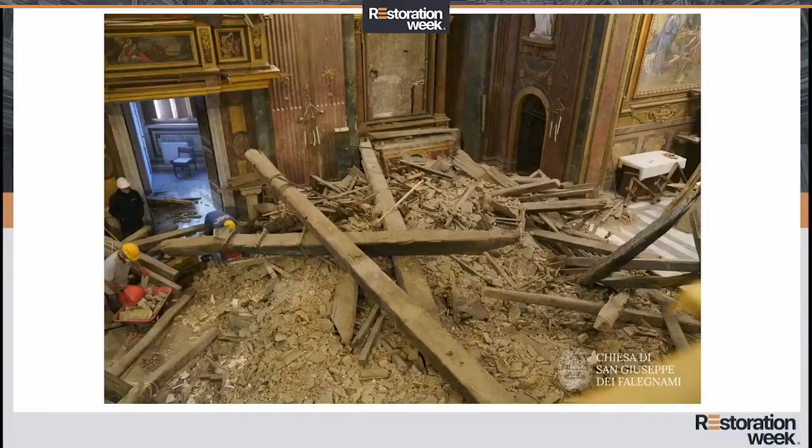Here you see the collapse that Mr. Bozzetti will show to you — the sudden collapse of part of the ceiling that caused several problems. So there was the collapse and the water falling that could continue to damage the building, the need to immediately protect it, and the need to understand why the roof had collapsed, and then all the subsequent issues, like how to reinforce the structure and how to reconstruct the ceiling, and all the related details.

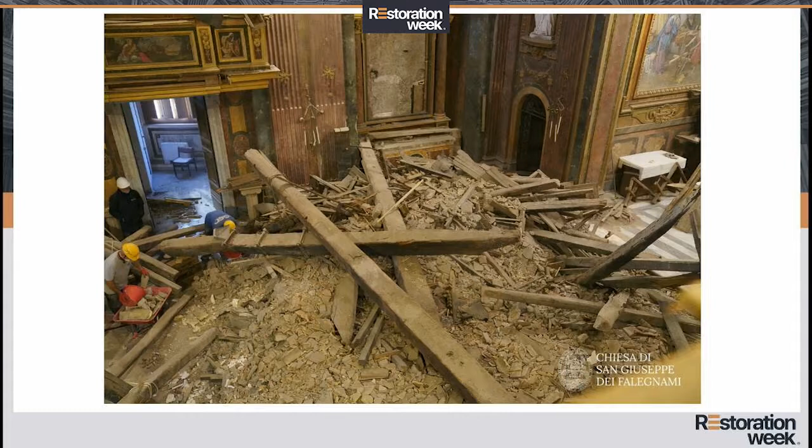So everything was approached in a coordinated way, with contributions from engineers and the Ministry of Cultural Heritage, and the utmost attention by the church in solving the administrative problems. And the result is very interesting.

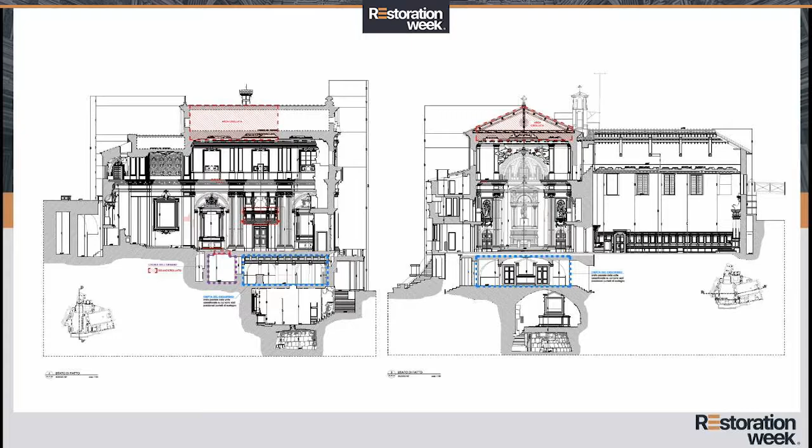In these images, you may see on the left-hand side the portion which collapsed, two-thirds of the ceiling. And if you look at the bottom, you see this area, which was a prison — it appears that St. Peter and St. Paul were imprisoned here. So it's full of history. This is a 17th century building, which was then renovated in the 19th century, so there were many restoration issues that were brilliantly solved.

So this is the decorated ceiling that has been restored, and which had been damaged — a wonderful ceiling that was studied in detail, piece by piece, with deep knowledge of each single piece.

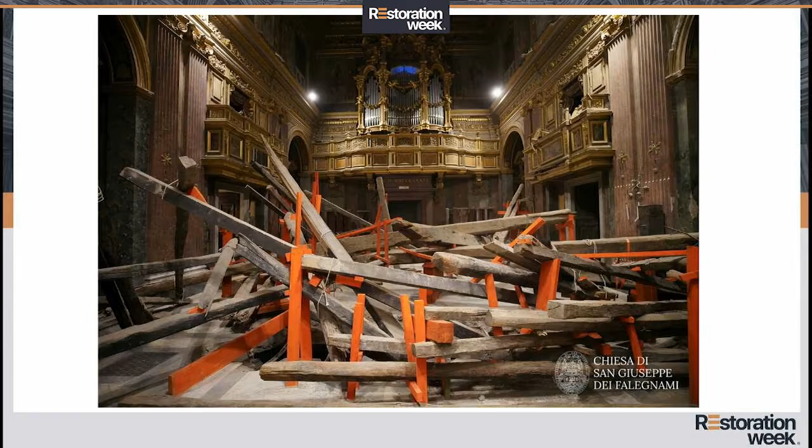So let's go back to my initial words: what is the common trait, the fil rouge? You need to study, you need to understand, both on the basis of the documentation you have and direct observation. Fortunately, a survey had been carried out just before the collapse, so it was possible to consider the techniques too. Each case is different from the others, but it's important to have broad knowledge — this is something Mr. Bozzetti is going to mention in detail. But in order to succeed in defining the causes and eventual responsibility of this collapse, some studies were carried out.

I was mentioning the guiding elements for the restoration. Several fundamental concepts have emerged that were also mentioned before: reversibility, intervention, compatibility, and the authenticity of expression.

You don't have to create any fakes. You have to allow the monument to tell its own history, which is embodied in its materials.

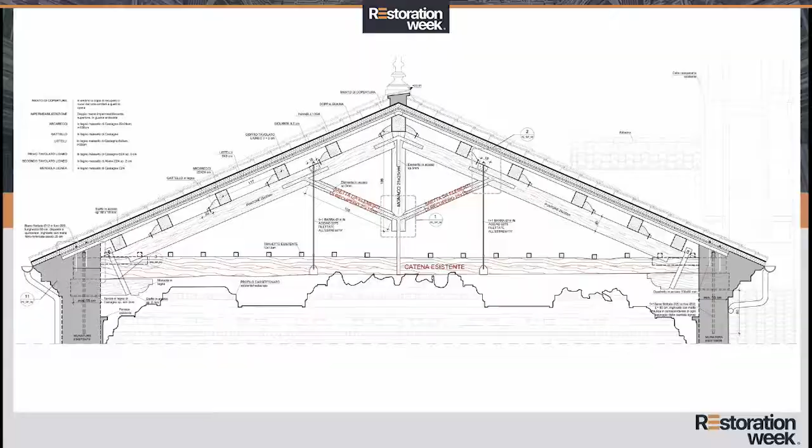In this case, we have a clear example of minimum intervention. This concept is sometimes misunderstood because it appears that you want to do a limited amount of things, and sometimes people think you want to do little things and you don't want to do too much. No, the truth is the opposite, because for this reason we wanted to keep, for instance, the old trusses, and we improved the entire system of trusses with that specific portion that allows the system to be sound. And this can also be reversible.

Then there is the issue of execution. In this case, two main companies worked: one a building restoration company, the other dealing with the restoration of the works of art. I had the chance to visit the site on several occasions, and I saw that they were keeping the ancient pieces and acting carefully. They were removing the trusses and the main structural items with a great deal of attention. So the restoration is a theory that translates into good practice.

That is to say, based on a project, on a plan, but also during the construction phase. There's Martha Nussbaum, a US philosopher, and Dario Antiseri, an Italian philosopher, who say that nothing is better than good theory, because sometimes theory is considered as just words, and practice is something different. Whereas a good idea guides a good implementation. This is the reason why preliminary ideas allow for good practical results.

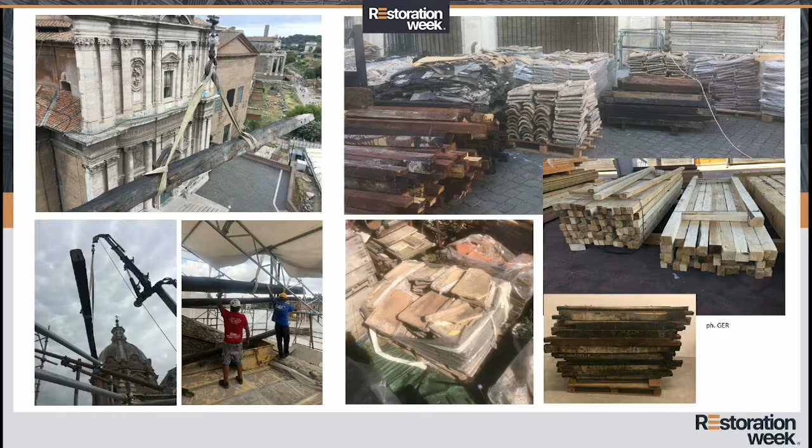After one year, the church was covered, and it was possible to organize a religious ceremony. Then after two years, the restoration is almost over, which is rare, I have to say.

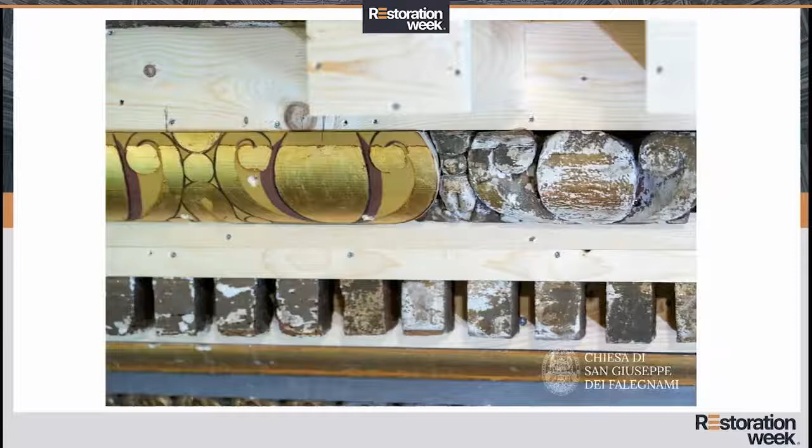So rarely, but it happens. Architecture was very careful. So the restoration is fundamental, and many things have to be taken into account.

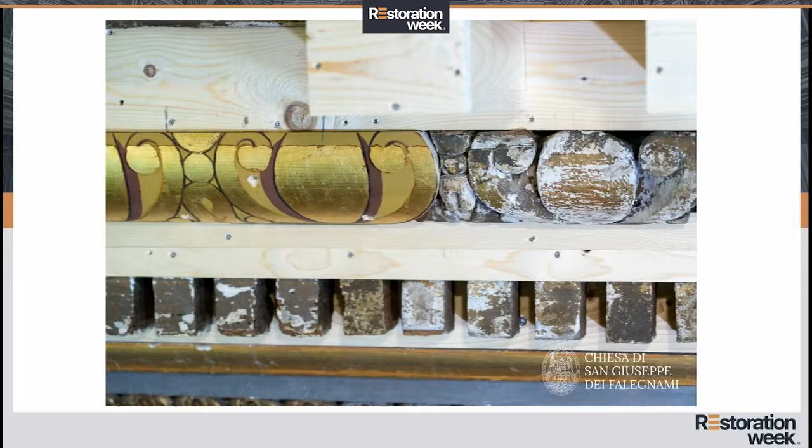So the authenticity, the distinguishing traits which have to be visible. Look at this frame: on the right-hand side we have an original part, and the left-hand side is a restoration test. It's not copying the old one, but reproposes it through, in this case, a pictorial system which is not the classic one. So it accompanies, but it doesn't create from scratch—allowing everyone to clearly identify what is authentic, what is ancient, and what is restored.

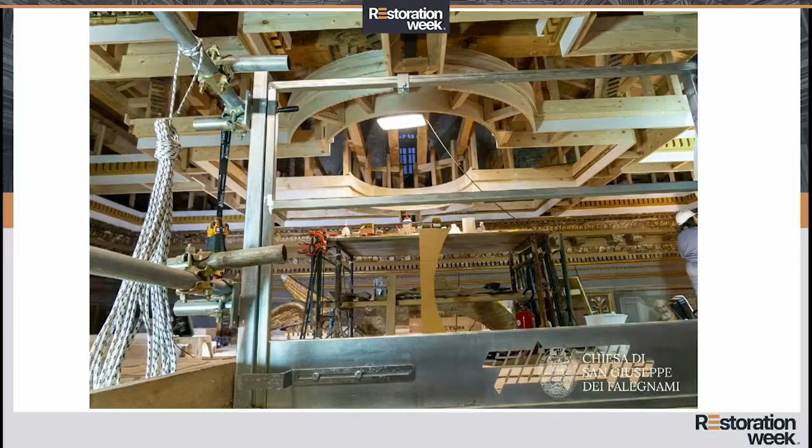By way of conclusion, it's easy to say things sometimes, but it is complex when you have to do them, in particular the reconstruction of the entire structure, for instance the ceiling. It's very interesting to see how observation showed that this ceiling was a work of art that had probably been modified by several people during several times. In fact, the horizontal pieces that had been introduced had been somehow moved in order to make them visible from the ground. But what is the effect that you get when you access this church?

Well, of course, the new part is the one that is more easily seen. So during the restoration, the new part is more visible at the center, and then the original pieces were put back in their positions, and all of the damaged portions were, let's say, put back. But what matters is that at first sight you have a complete reconstruction of this image, also in consideration of some interventions we made. So each single item, each single element was catalogued and kept, and whenever possible it was put back in its place, and the original pieces were put at the center of the image, so that it was important to show the ancient part. But these wooden pieces were not cut.

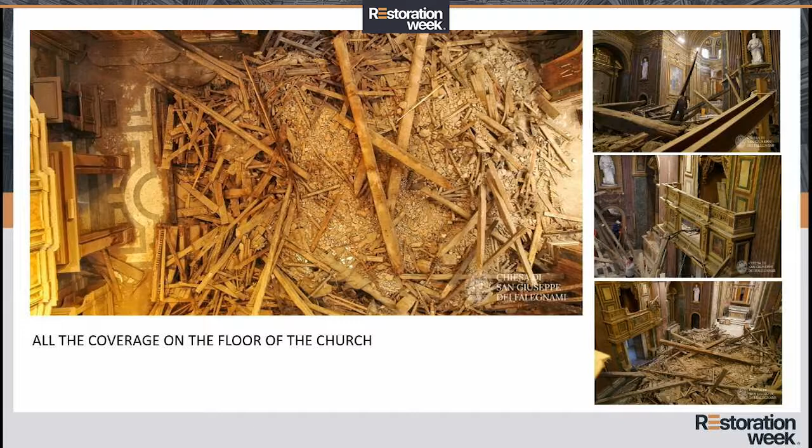In these images, we have two thirds of the roof which collapsed onto the floor of the church, and which also partly caused the collapse of the area in which we are today, of the ground. And of course, this disaster is clear.

As Professor Carbonara said, during the first phases works were aimed at preserving the materials, also with some provisional covering with pipes and joints, and some shields that we put on the roof, because there were a number of investigations ongoing to understand the causes of this disaster, this collapse, and any persons in charge and responsible for it. There is still a judicial proceeding which is ongoing, so we are saying nothing about that, and nothing about the conclusions that were somehow reached.

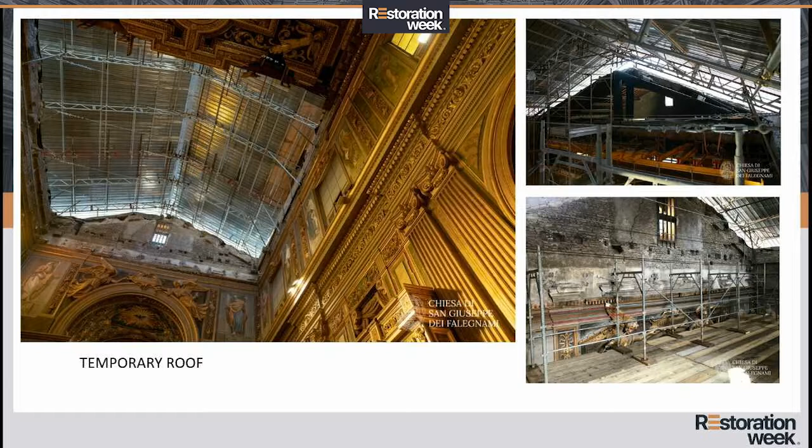We can only say that the causes are neither due to aging nor due to, for instance, rain or attack by microorganisms that had eaten the essence of the wood, and therefore it could not hold the roof any longer.

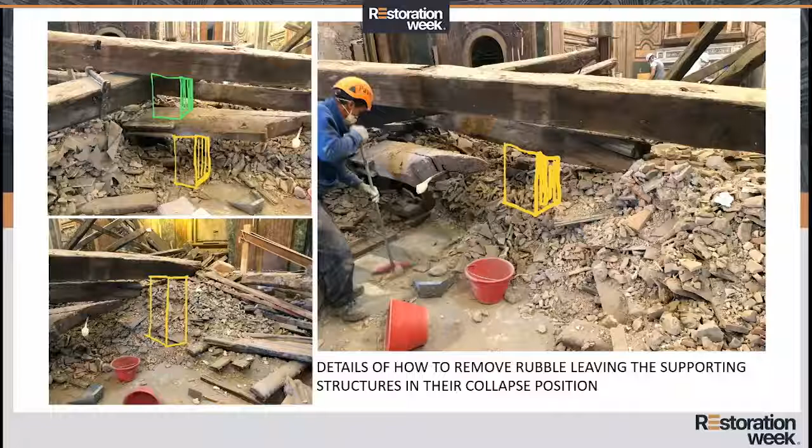These are the images that show the activities carried out during the works. During the investigations we were asked to keep all of the wooden structures in their position after the collapse. In fact, we kept, for instance, as you can see from these images, all of the objects as they were.

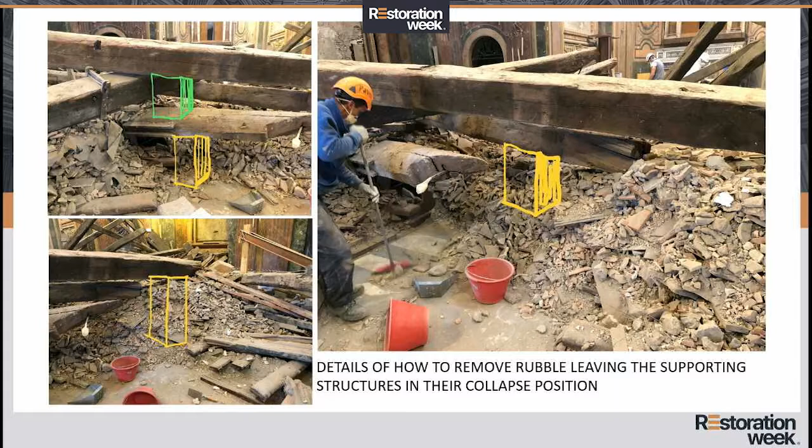Now there is an image which shows the way in which we worked. We were all at the site, and these are some sketches made in order to explain and understand how to proceed, by lifting the bearing wooden structures and removing the rest of the materials. This brought us to the configuration that Professor Carbonara showed, that is to say, the whole freed from the entire portions of the coffered ceiling, and from all of the remains and debris that were on the floor.

The things you see in yellow are some wooden items included, and they were colored yellow because they had to be visible. This allowed the magistracy to take pictures and laser scanner images, and to deepen the knowledge on the main and root causes of the collapse.

So the entire planning of the activities and the design, although the site had not been unveiled, we were already thinking about how to construct. As said before, the work started on the 3rd of June, and by August we had already completed the roof. So here it shows how we conceived the ceiling and the covering.

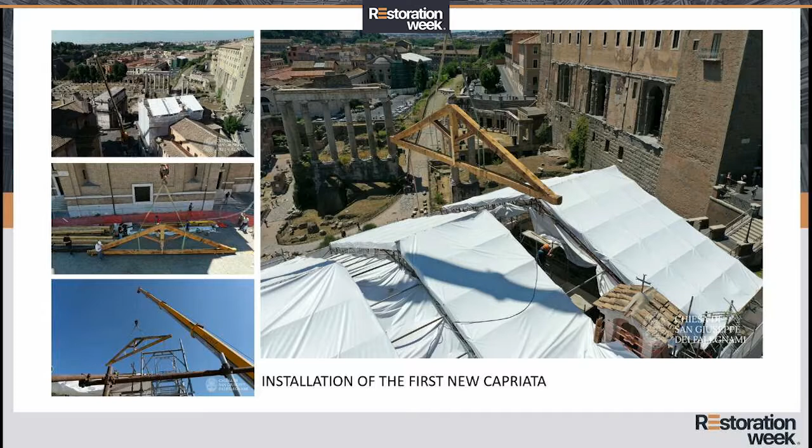There were three main fixed parts and two central ones with some covering that could be moved. So there was a pre-assembled truss that was put in place by only removing the main flap. And then some specific activities, like, for instance, the basis of the truss.

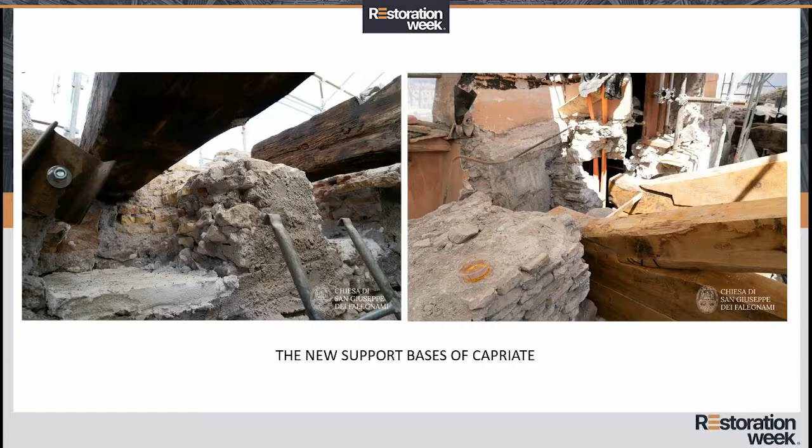And then we're going to show a video that shows the inclusion of some items, for instance, that increases the basis of the truss, thence reducing the area in which it was possible to work.

And also, this is the item I was mentioning that didn't exist before. Before putting it on the wall, there was this bracket, this console that separates the bracket from the wood and preserves the bracket and the entire truss. But the supporting portion was free, like 2 or 3 centimeters of air, which also allows inspection and maintenance whenever needed.

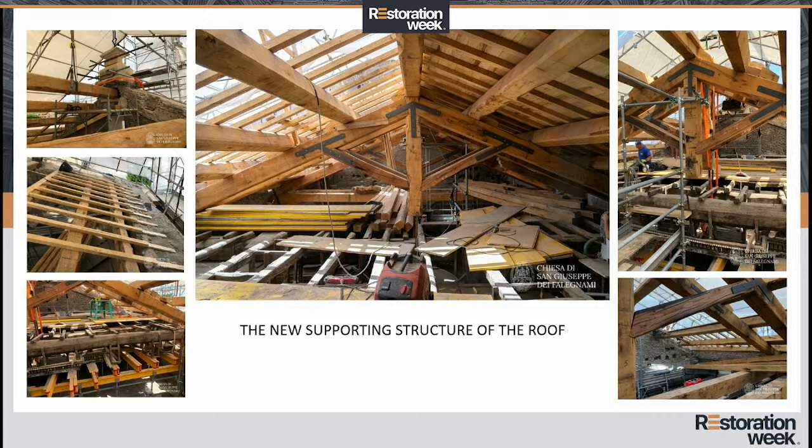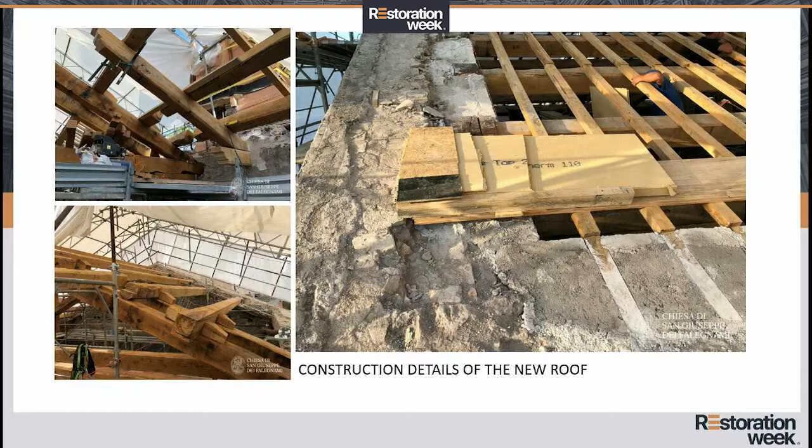So these are some images taken during the execution of works that show the accuracy and the ways in which the various activities within the restoration works were carried out. These images are evidence of, for instance, the final layer. This part, which before the collapse was made of bricks and flat bricks, was replaced by a double cross layer and also by a system of thermal insulation, which makes everything lighter and more compact from the anti-seismic standpoint, allowing better conservation of the wood.

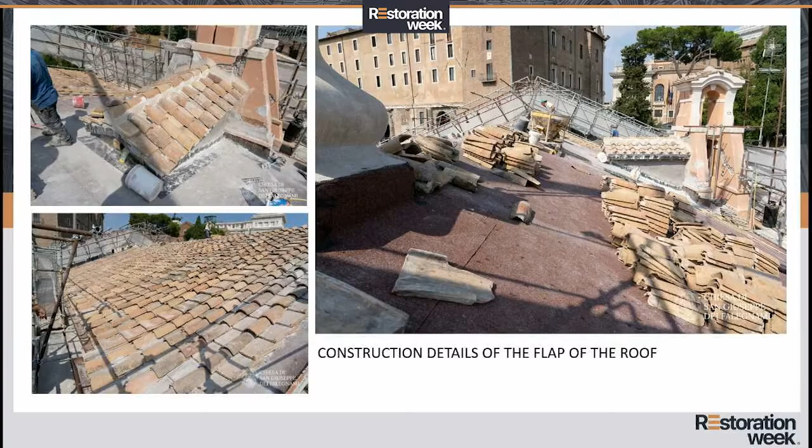So this is one of the final phases, in which we also see the possibility of insulating the area and the waterproofing, and also putting the tiles on the roof.

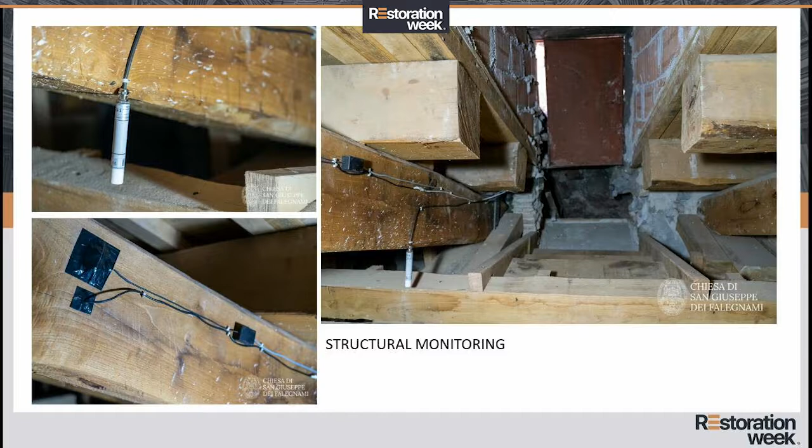In this phase we also installed an environmental monitoring system which monitors temperature and humidity, because it's necessary to keep monitoring the situation. It will help us understand whether we need to add a system of windows to manage humidity and temperature, or whether we need an air conditioning system. The main reason is to allow the microclimate under the roof and above the ceiling to have a temperature that improves the lasting of the entire structure.

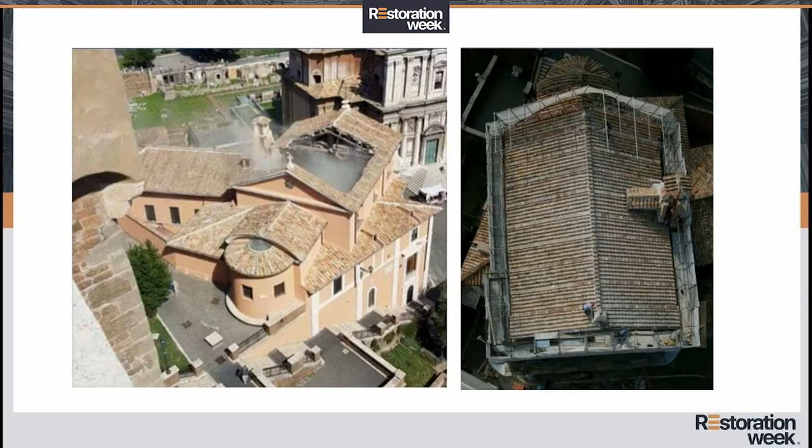So you see that 12 months after the collapse, this is how the situation was. So we are fast, when we tell things.

But there are two websites in which we have detailed information. One is the one of San Giuseppe dei Falegnami, and the other one is a magazine that allows you to collect more information in this connection. Thank you.

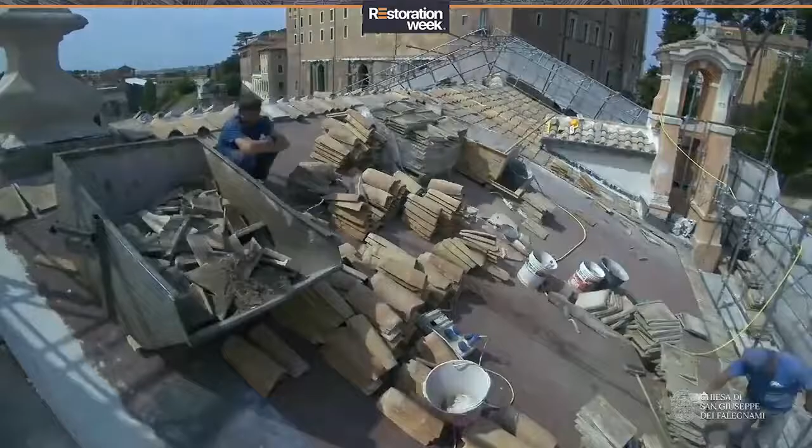So we saw a time lapse showing the entire reconstruction of the roof, completed on the 30th of August 2019. The activities started already, also for the reconstruction of the coffered ceiling, with a series of meetings and debates and sharing of views, and also design in order to make the best choices.

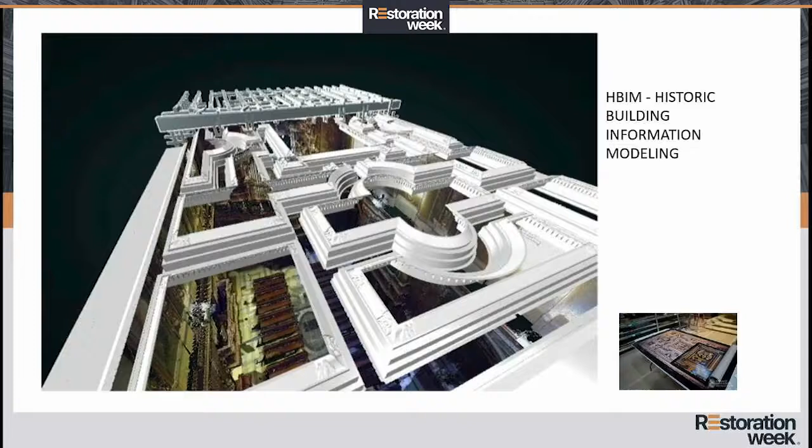So this image is a high-definition one that we had, because in 2015 the entire structure had been restored, at least the external part, in order to open the museum which is close to this place. So luckily we had this high-resolution image and a laser scan of the entire situation, giving us a geometrical basis that was quite reliable.

And to it, we added our own surveys. In fact, here there's a portion of reconstruction in HBIM form, made through the laser scan from 2015. In the background, you see the reconstruction of the lifting system of the coffered ceiling with the two transversal items, that is to say the main portions of the trusses which had not collapsed.

For this reason it was possible to make the 3D projection of the entire structure and to make our checks and assessments. This is the main structure on which we put the main portion of the coffered ceiling. All of the surveys were necessary to achieve the precision needed to put two-thirds of the coffered ceiling back, and to put each piece back to its original position.

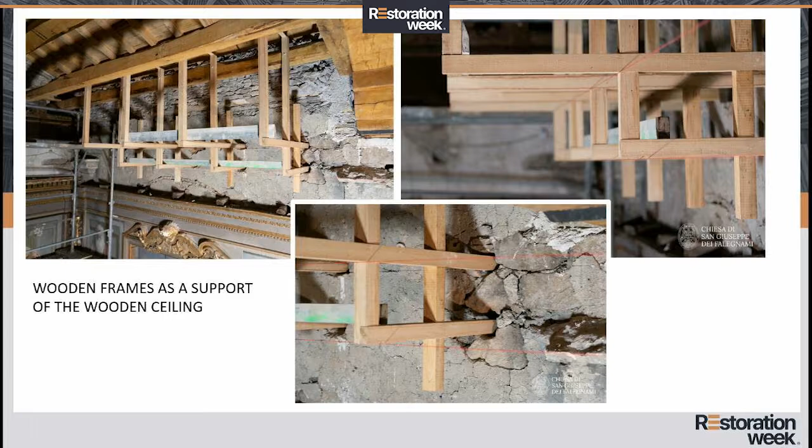So in this case, together with Leonardo and also the other companies, we decided to make sustainable interventions, and therefore we decided to take this wood from Cadore, where in 2018 there had been a flood. Many trees had been destroyed due to the flood, and we decided to buy the timber from those companies that had that wood.

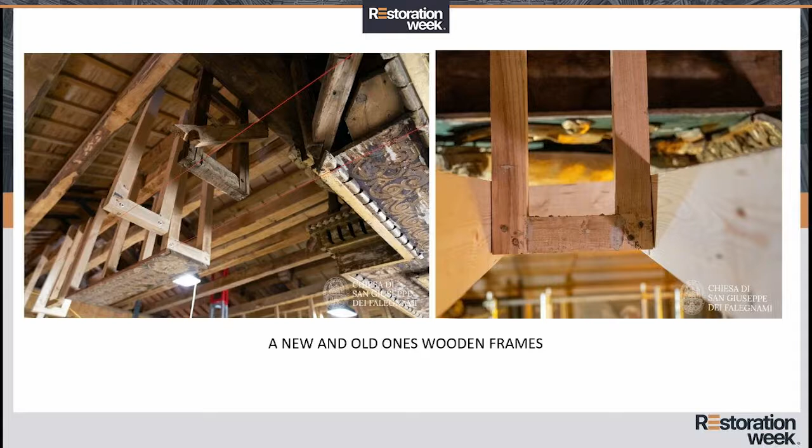So these are some details that depict the main structure on which we put, for instance, the different portions of wood, which are then decorated, and then the frames were added, as we mentioned before. This is a significant image, and I hope the green, yellow, and red colors are visible.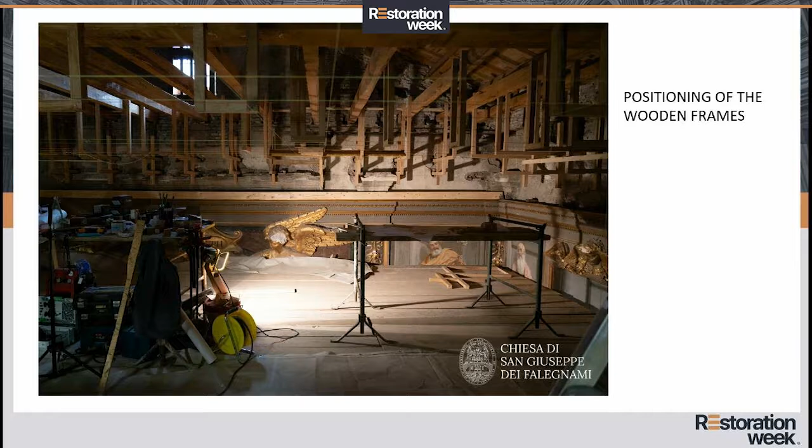This is how we organized the reconstruction, with a matching between these surveys and the images we had from the 2015 surveys and the beam data. So these are, for instance, additional items for the curved portions, which were then molded in order to obtain the right curves and the right shapes, that is to say the ones of the existing coffered ceiling.

This is an image we saw before. This is the way in which we could reach the upper part of the church, and this part was completed before applying all of the frames that we had recovered in the first phases following the collapse, and also the ones we constructed and developed subsequently. So now I give the floor back to Andrea, and then he decides to whom he wants to give the floor after me.

As we said, we have analyzed causes and effects of the collapsing. Structure is a priority here, but the emotion of a house is given mainly by its skin, the decoration, the aesthetics. So restoration together with structural restoration is a very important part. Paolo Scarpitti, Special Superintendency of Rome, has dealt as a designer for the restoration of the surfaces. Thank you, Paolo.

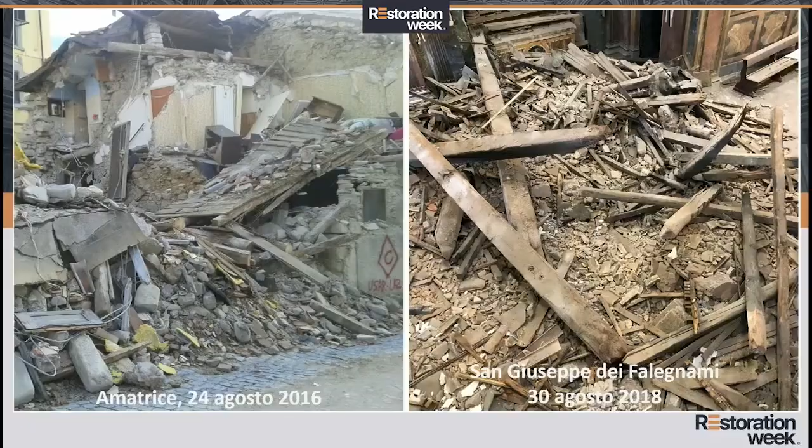So we may see that the ministry was involved in all of the disasters that take place in Italy. In this case, you see an image of Amatrice taken on the 24th of August 2016, and two years later in this church. Similarities are there, but the experiences we gained, especially in the last three earthquakes, allowed the ministry to improve its skills in terms of cataloging and preservation, contributing to the restoration of the coffered ceiling in this church.

So the first thing done was dividing the map and the points where the debris fell into 6 colors. You see the different colors. At the same time, we identified the specific items, and each one was given a name. For instance, H1, so H Lacuna, H1 the Madonna, and H2 Saint Joseph. But each and every time we were taking debris, then at a one-to-one scale, the single elements and items were...

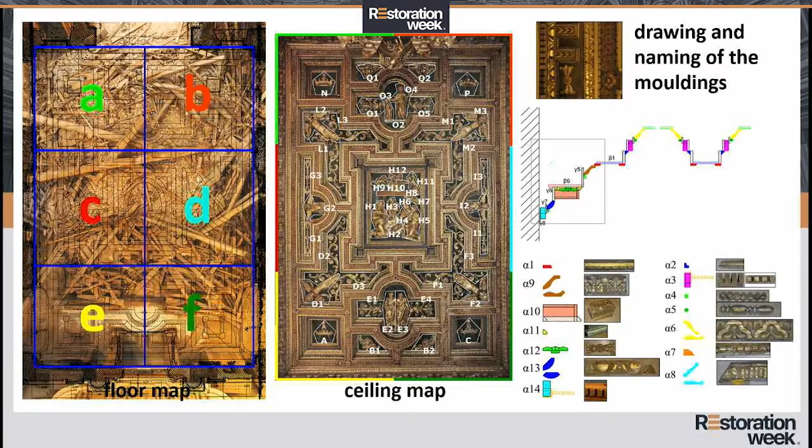So once the map was drafted, as it happens with earthquakes, the first thing we did was first cleaning of the elements in the apsis of the church, which had been left intact, to remove the dust that was there. And in the oratorium close to the church, we arranged a sort of warehouse, like the ones we've arranged in different Italian cities following earthquakes, like in L'Aquila or in central Italy or in Emilia-Romagna.

So we were making a sort of clear inventory of all of the pieces, which were measured and then put inside of each single scaffolding. So this is an example...

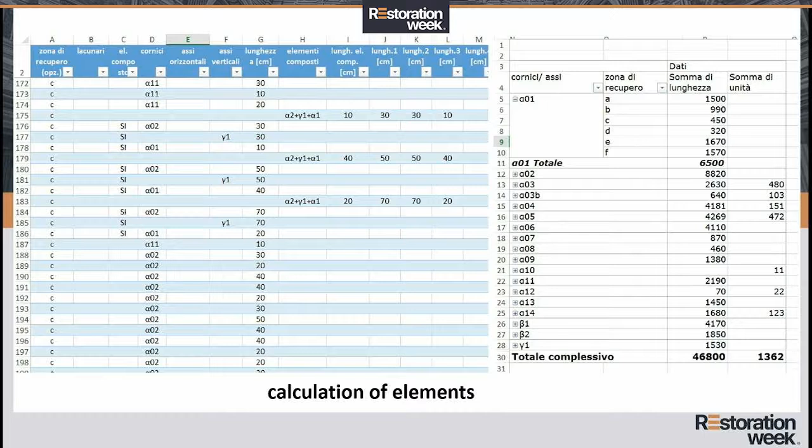...of the database that we have developed, also together with Leonardo, which helped us in making this extraordinary intervention. It was fundamental for us because, as you may see, we have divided - you may read the different portions, all of the elements included in our inventory. So we knew where each portion was taken, where it belonged, and where it was put, and then also quantified, because we needed to understand how many pieces needed to be reconstructed versus those that had been recovered.

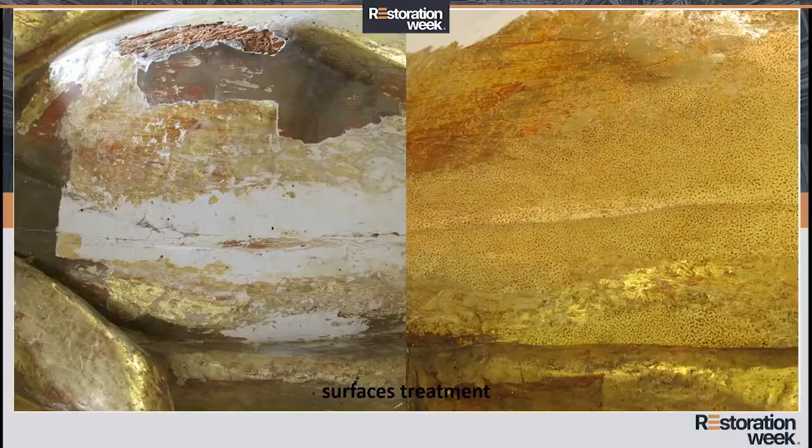Now let us go back for a moment. You see, if we go back to the slide projection, what we were saying before is clearly depicted in these slides.

On the left-hand side, you see the conditions of the Madonna's left leg, which we saw before. There's a very dark layer that was included in several portions. Under this, there was another layer of gilding, to arrive then at what you see at the bottom, somewhat abraded, which is the original gilding.

Once this second layer was removed, we find ourselves in the situation on the right, where you can clearly see these dots. This is essentially the equivalent of gold, though there's no actual gold, just a chromatic aspect. But from a distance, these dots mix together and give the perception and idea that it's golden.

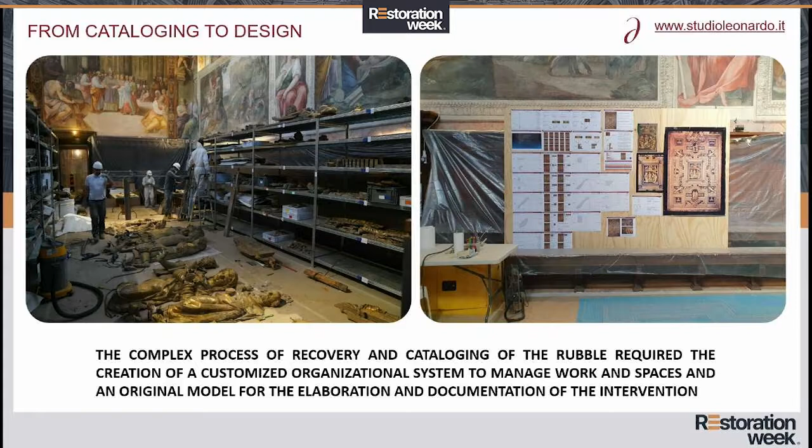We took part in the recovery phase of those portions that had fallen from the roof, which we recovered. That was very important, because by doing so we were able to better understand what had happened, and therefore we started thinking about how to better restore the ceiling.

As Dr. Scarpitti said, it was very important to analyze and study the pieces that we recovered, and also the study of the decorated elements, of the statues, for example. That too was very important.

Now the serial pieces were identified through this analysis by Dr. Scarpitti in various phases. There was a very punctual analysis carried out for each element with the laser scanner survey that had been carried out some years before.

Thanks to that, we were able to measure what portion of each element existed and what instead had to be filled in. So we were able to identify the quantity of the serial elements that were recovered, 49.5%, and that helped us decide how to reconstruct and integrate those elements.

Now the work then brought us to an even greater recovery. We were able to recover 65% of the original portions in the serial parts. The estimate was initially a little bit lower than it actually turned out to be. As to the sculptures, we were able to recover 90% of the elements.

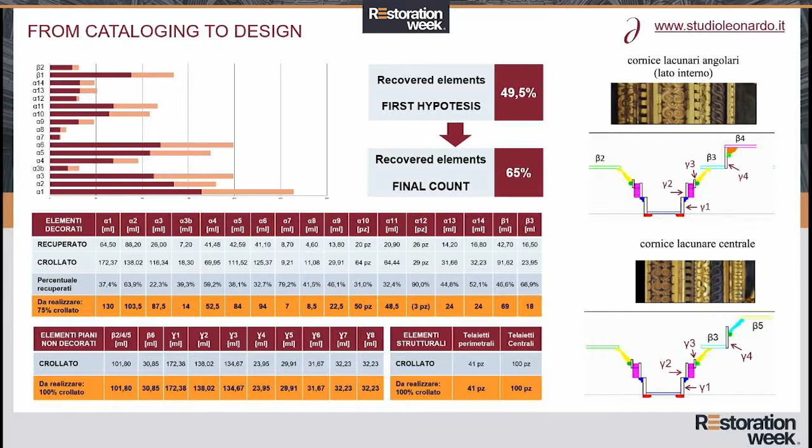So based on that data, we started the intervention, our reconstruction, and of course the laser scanner was the starting point, which you see there on the right, because it was fundamental to obtain all of the information, all of the details, which during the restoration itself proved essential to address the questions I was referring to before.

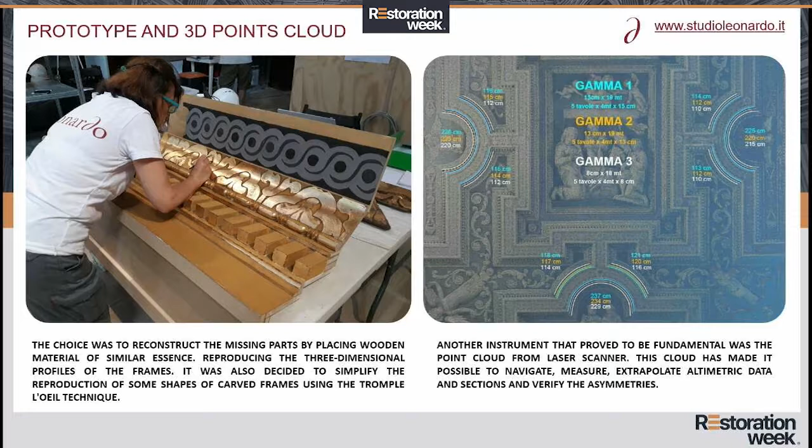So it was like having a virtual ceiling that we were able to use in trying to address the various issues. Then another very important thing was the creation of a prototype, a physical prototype, which we positioned in this area, to try to understand what impact the reconstruction hypothesis would have had before the reconstruction itself, using for example the lights and shadows and the technique of decoration.

And then starting from this, we were able to start with the site. There were 4 parallel areas. The first 2 that you see represented here started immediately at the end of June 2019. The first one was the site here in Rome, to recover and restore the original portions which had fallen and which, as I explained, had been recovered and catalogued.

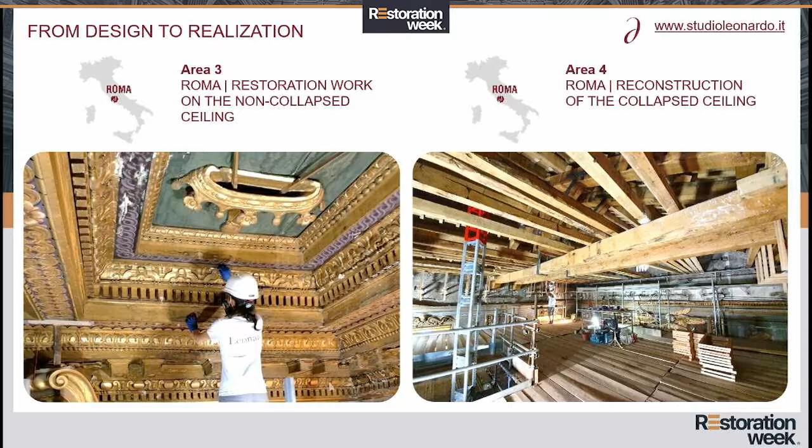Then another team of restorers and carpenters worked in Bologna in a laboratory to create ex novo some pieces which had to be integrated with the pieces that had been recovered. Subsequently, starting at the end of August, when we could work directly in situ, we started 2 other parallel phases: Area 3, restoration work, with that portion which remained in situ and was conserved; and Area 4, with the reconstruction of the area that was missing.

As to Area 1, the restoration site with those elements that had been recovered, Adele Galitte had an intuition. She was one of the technicians who acted as an overseer for this site, so she created a one-to-one reconstruction.

Based on the laser scanner, we reconstructed, much like a puzzle, the decorations which were missing. The fragments were sometimes very small, so the work was very difficult. We had to carefully recover and consider each single piece, and position them as closely as possible in the original place.

A detailed analysis of these pieces told us that some had to be placed in specific positions. Their sizes were such that when you looked at them from below, it appeared that they were somehow moving. So it was very important to reconstruct things as we did.

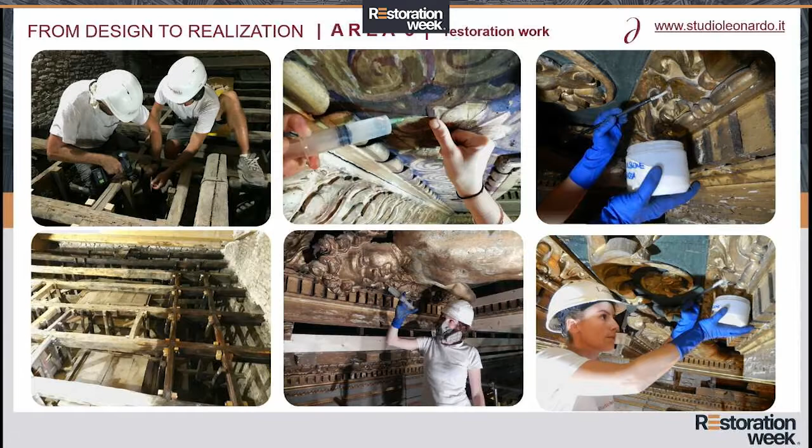This was the area that started at the end of August, the restoration and recovery of the portions that remained in situ. This was fundamental because it allowed us to better understand both the structural part and the decorative one, and to truly understand how the ceiling had been made.

So we were able to study the restoration, study the decorations and their state of conservation.

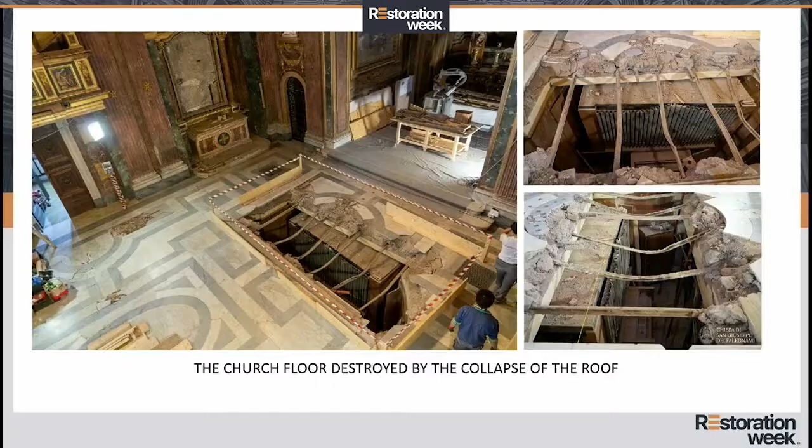This is an image that clearly shows what I'm talking about. It refers to exactly this place where I'm speaking right now. The area above us is not geometrically extended to the entire part of the church. So this is the image I'm referring to.

As I was telling you, this is the part of the ceiling that caved in, that fell in due to the collapse caused by the roof elements that fell. This was probably something created in the first years of the 1900s, and which was therefore more delicate, and weaker, and so it completely fell in and crumbled after the collapse of the ceiling. It was completely reconstructed.

In this case, the difficulty was exactly the same as with the coffered ceiling. I'd like you to notice that the design of the frames of the pavement represent the exact projection of the lacunari of the coffered ceiling, where we have the nativity in the central part. There is a geometric design which represents exactly that.

On the left there is the statue of the Madonna and the Holy Child, and then St. Peter and Paul on the other side, who are the patrons of Rome.

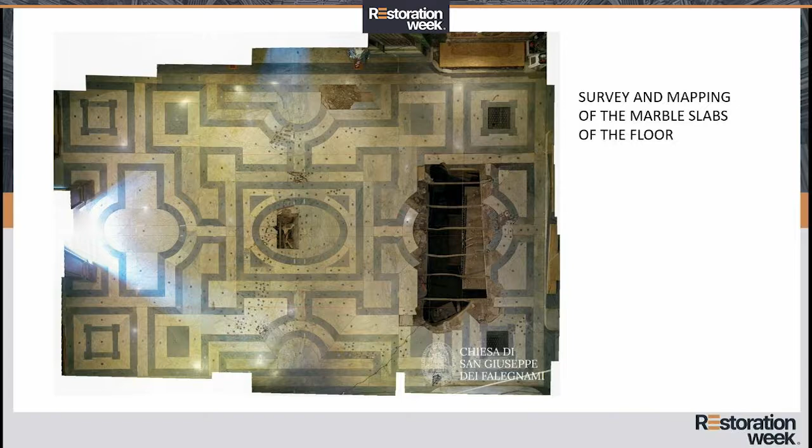There is no design of the area that collapsed, the one we see on the right part. So in this case, we took the part from the left and created a mirror image on the other side, with all the approximations that pertain to this type of approach.

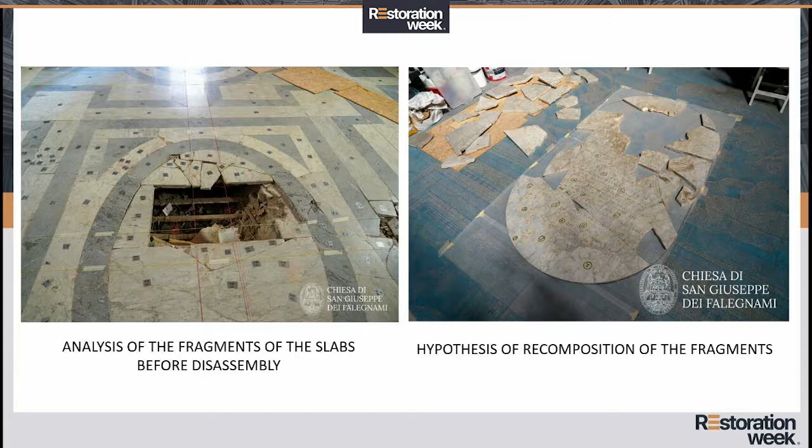Of the part that collapsed - the one that collapsed due to the collapse of the wooden part of the ceiling.

These are the various phases in which we dismantled the pavement, which sometimes created problems, even in terms of space, because the entire site had to take place here inside. There were no exterior deposits because we wanted the site to be kept as much as possible within the church. Luckily, there is the oratorium that we were able to use as a deposit for the parts relating to the pavement.

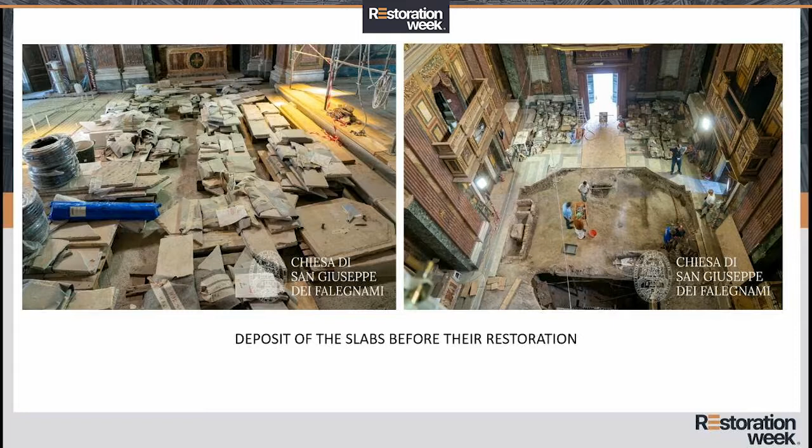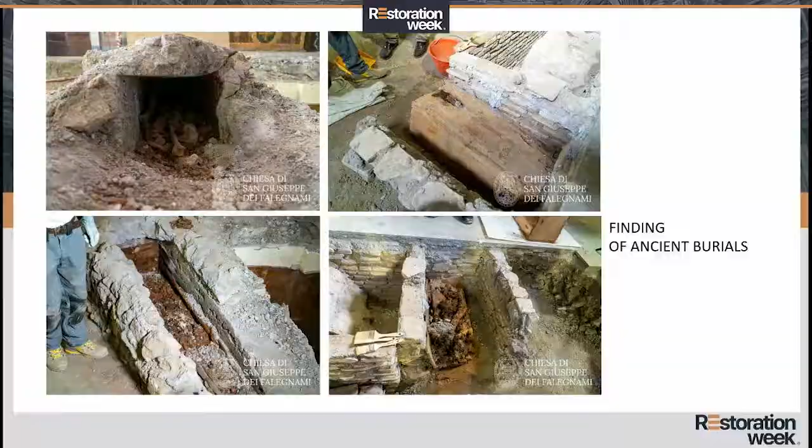Now, here you can see on the right the work, and in some cases we removed up to 1.30 meters of ground that was weighing. We also found three sepulchres here under the pavements, which were recovered, studied, and repositioned in the place where they were found during the consolidation of the area.

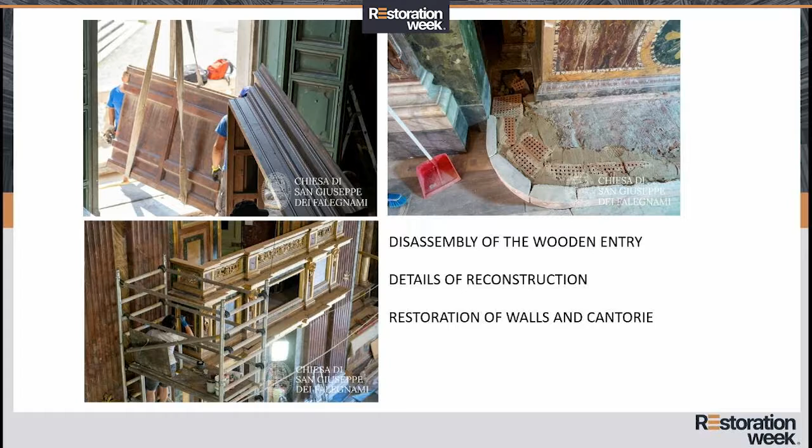This altar saw the destruction of its base, and at the bottom left one of the two balcony choir lofts suffered damage and was reconstructed. This balcony was damaged too, and it was completely reconstructed entirely in wood.

Another thing that we wanted to introduce in this project is to make sure that the lighting system is part and parcel of the restoration itself.

Before the collapse, there were some LED lights, very strong, but there had not been a specific project designed for this case. So we decided to do something different.

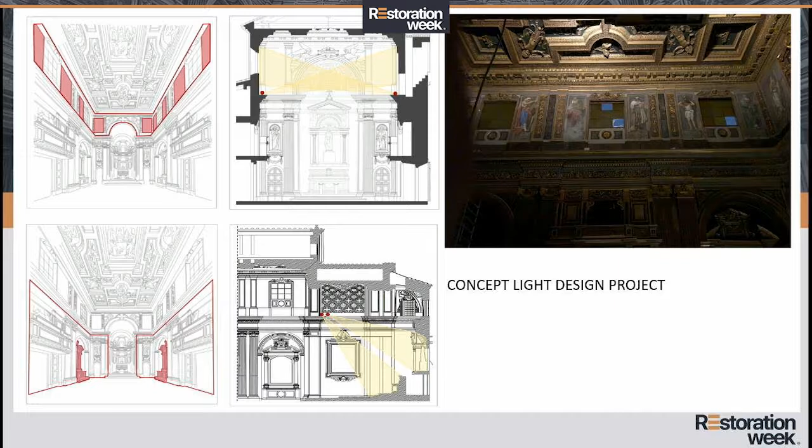We carried out a lighting study, and we wanted the illumination of the coffered ceiling and of the figures presented over the frame to have a softer lighting, as it sometimes had in the past when candles were used. So we wanted to create some ambiance, trying to perceive the coffered ceiling restored, but lighted in that way.

These are some tests that we carried out a couple of days ago, with some samples, to try to verify the warmth of the light and the system of juxtaposition of the spotlights that can reduce the shadows which would normally be present in these cases.

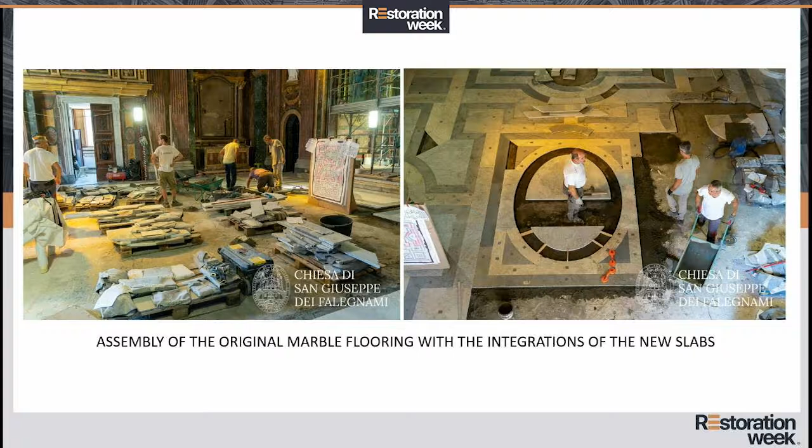Now, these are some phases that date back to some weeks ago, where the lapidary elements are reproposed, including the central one that I was talking about before. This is the grid and the reconstruction of the lateral parts.